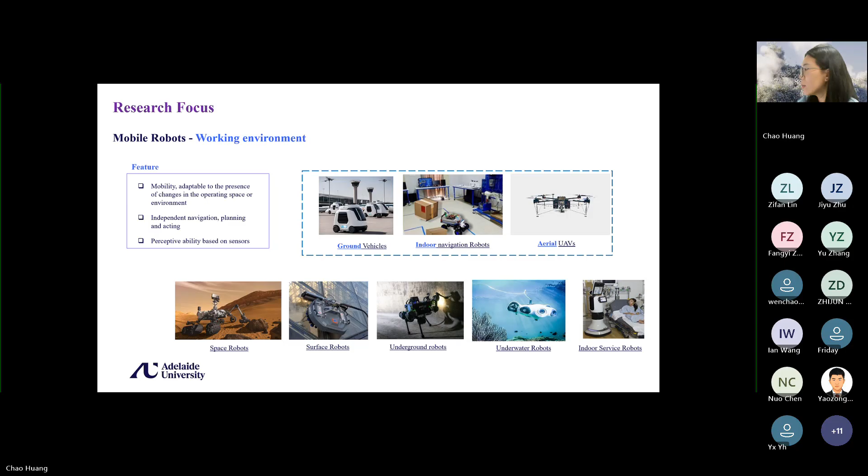If we further break them down, we can obtain this figure. It actually contains 10 research topics. Due to time limitations, I cannot introduce all of them. I will first briefly introduce the idea behind these 10 topics and then select some representative topics and provide the details. I may spend more time on the intelligent vehicle systems, as I believe it aligns with the topics and focus of this society.

So the first thing is single UAV control and application. One fundamental research question is called waypoint flight. We want the UAV to quickly go through a series of waypoints without collisions and with minimal tracking errors.

To address this problem, we devised a sequential convex programming framework for agile flight. This trajectory planning problem can be formalized as a time optimization problem subject to a series of safety constraints. Since this original problem is highly non-convex, we transfer it to a sequence of convex optimization problems through successive convexification and discretization. This allows us to achieve highly efficient computation of high quality trajectories.

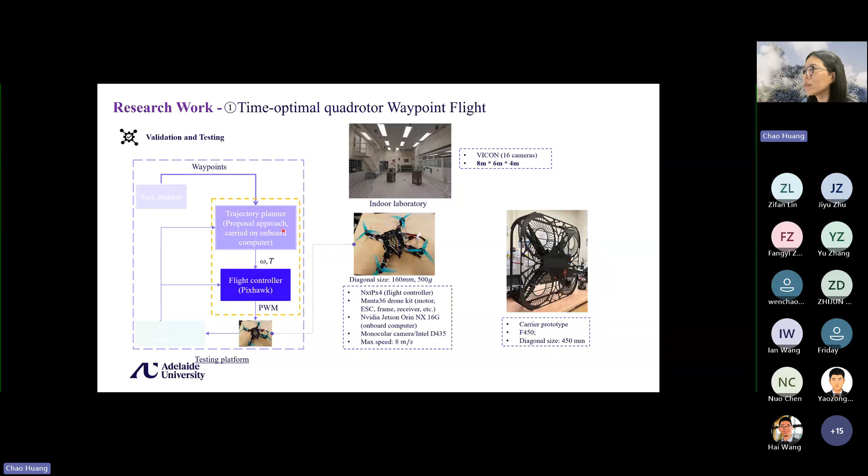So here is a demo. It shows that the UAV can successfully go through a series of waypoints. So here we actually have 7 waypoints, and the computation time is quite small. So you also find that to quickly and accurately go through these waypoints, the small UAV actually conducts a series of aggressive maneuvers, including rolling, diving, and pitching afterwards.

Next one is about the landing. As I mentioned, we are interested in how to land a small UAV on a moving aerial platform. We find that existing methods may only focus on landing on a large board, moving ground robot, and moving ground vehicle or terrain, but we focus on landing on an aerial vehicle carrier. We believe it is more challenging because it involves lots of uncertainties.

And here are our designed algorithms. I don't want to provide the details. So if you look at this figure, it shows how we actually developed this landing trajectory. We actually divided the entire landing trajectory into two segments. The first part ensures that the UAV safely reaches above the carrier platform, while the second part involves the UAV descending within a landing cone until it lands on the carrier.

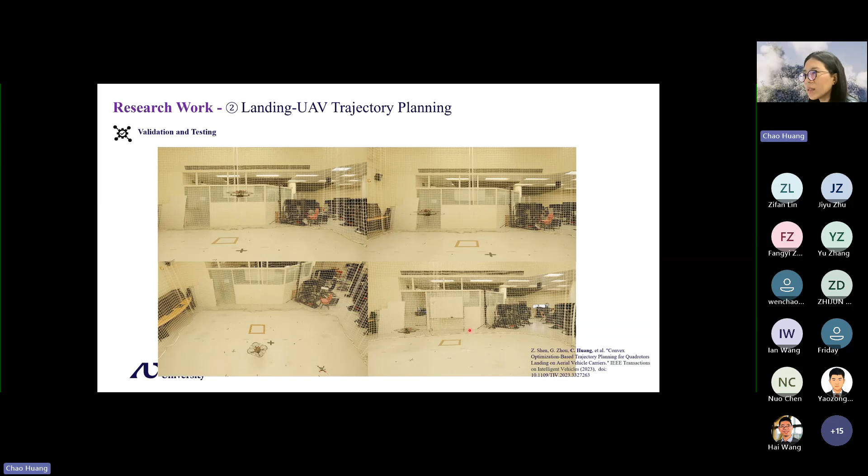We have 4 GIFs. The top 2 GIFs show that the aerial platform is stationary and the small UAV just needs to find the location of this big UAV and land on the top of the big UAV. And the bottom 2 cases show that the UAV carrier is moving. On the left, they are moving in the same direction. And on the right side, they meet in different directions. Okay.

So when the UAV can rapidly fly and land on the dynamic platform, we consider leveraging the UAV in conjunction with stations or trains to extend their flight range and facilitate tasks such as parcel delivery. So we have 2 application cases. First one, we consider the case that we have a number of charging stations. We have a depot, we have a customer here, and we want a small UAV to deliver the parcel from the depot to the customer.

But as we know, due to battery limitations, the small UAV cannot fly for a long time. So during the flight, the UAV has to land on one or several charging stations for recharging or maintenance. So in this case, we need to determine which charging station to select, when the UAV has to land on the charging station, to what percentage to charge the battery, and what if some charging stations are unavailable. So how to solve this problem? We propose a graph construction method to formulate the problem and adopt a graph searching algorithm to plan the path.

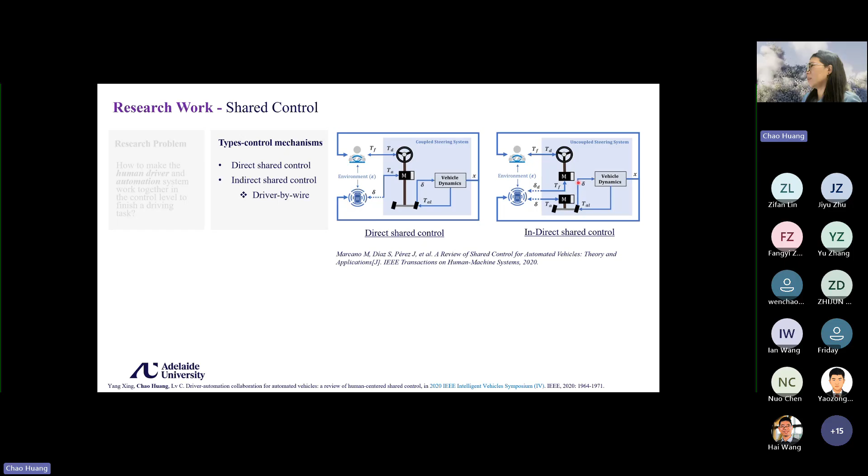If you look at these mechanical systems, you're going to find the main difference is that in indirect shared control, the driver's input does not directly transfer to the steering system. It goes to the ECU, electrical control unit, first, and after calculation, this signal then goes to the vehicle's steering system. In my research, we usually focus on indirect shared control because it provides more freedom of design.

Well, next one is about the human-machine interface. So, based on the modality of human-machine interface, it can be represented in visual, auditory, and haptic. So, basically, the first two types are usually used to provide some warning signals. By using the haptic interface, that will provide some vibration signals on the steering wheel, then it can actually provide useful torque feedback. And in this case, it can somehow assist the driver to understand the current driving situation.

And when we talk about the controller design, it can also be classified into reference-based and reference-free-based. So it is easy to understand. Reference-based means that we always have a reference signal. So in control theory, we know that sometimes we have a reference signal and we have a controller, and the controller is used to track the reference signal all the time. So in the reference-based, we always have a reference trajectory, and automation will always correct drivers' or vehicles' status if there's a difference between the reference trajectory and the current trajectory. So if you look at this figure, you can consider that automation and human actually work together all the time to finish a task.

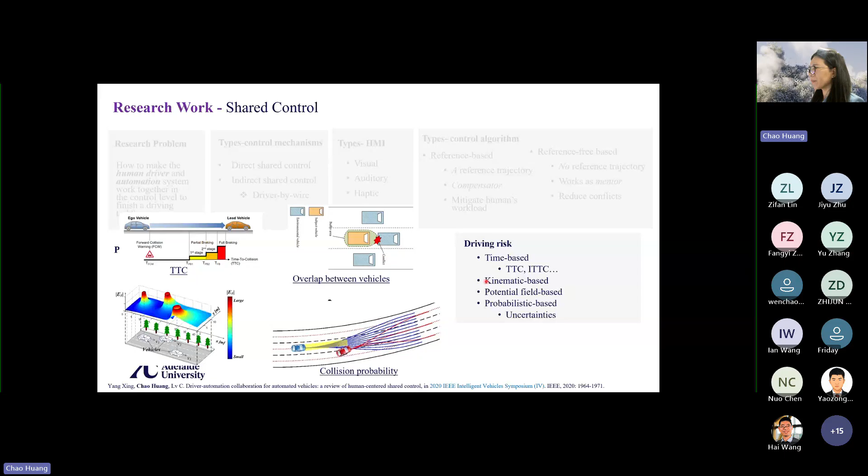So there are different approaches to estimate the driving risk: time-based, like TTC, a very traditional one, kinematic-based, potential field-based, or probability-based. And the last three approaches always need to rely on trajectory prediction. So in academia, we have several different approaches, like physics-based approaches, maneuver-based, and interaction-aware-based.

So interaction-aware-based, based on this name, you can guess how it works, right? Or guess the principle. It means that you consider the interaction among the different traffic participants and then provide a deterministic or probabilistic prediction result. I think it is a very promising approach because it is more realistic compared to the other two approaches.

Last one is about the testing environment. So as I don't have real test vehicles, I only focus on the small robot and the driving simulators. So that is what we have right now.

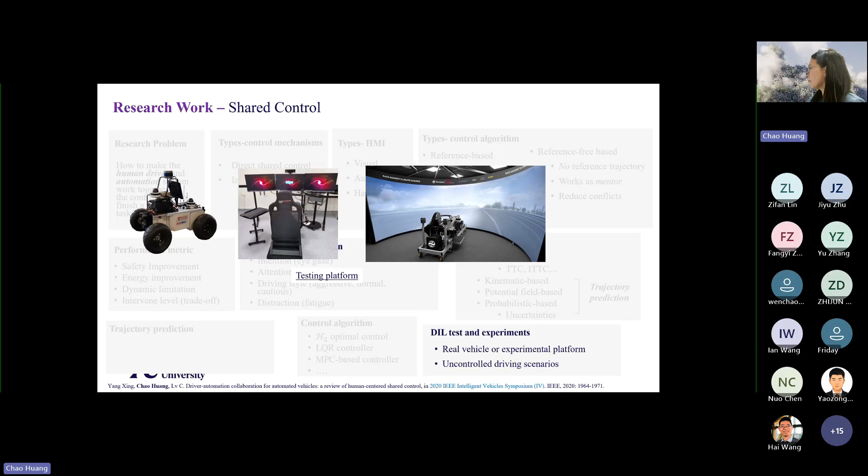Okay, so let me just have a look. Oh yeah, the first step is to establish a virtual traffic environment for testing. Okay. Oh, doesn't work.

So actually, CARLA is a very commonly used platform for testing. They already have a mature testing environment, but we want to design an environment by ourselves. So we established a 2 kilometer traffic testing environment centered around PolyU.

My previous affiliation. We collect the real traffic data in Hong Kong to ensure that the surrounding vehicles and the road conditions within the testing environment can accurately reflect the traffic conditions in Hong Kong. We also ask Hong Kong drivers to play with our driving simulator and give us some cognitive feedback. Okay.

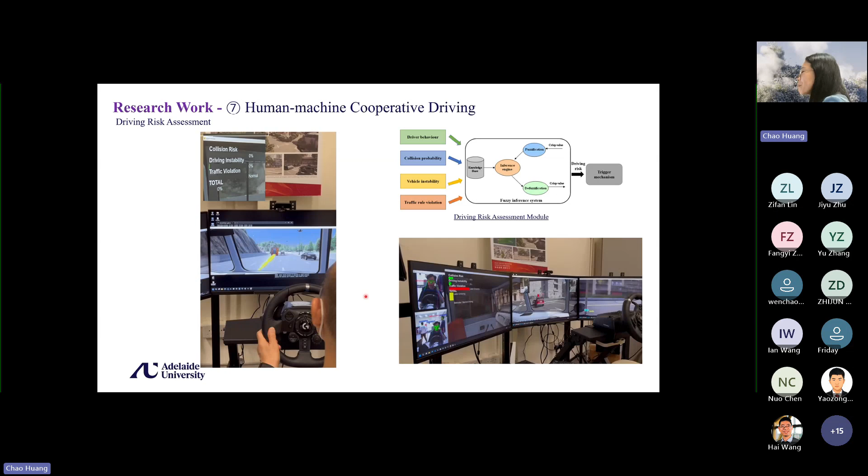So what should we do if we estimate a high driving risk? We're going to generate a path for the vehicle to follow. Due to the Hong Kong policy, we cannot directly control the vehicle, but we can provide some guidance. So in this case, we try to design a path, and theoretically, if the vehicle follows that path, we can guarantee there are no collisions in the near future.

And as I mentioned, we use RRT. We designed a human motion RRT algorithm because it can quickly grow a tree, cut the unuseful branches, and quickly find a feasible path. So these are some simulation results, and that is how we grow a tree and cut the branches, and then finally find the feasible path.

And to speed up the calculation, at every sampling time we didn't regrow the tree. We actually used the previous tree and kept some useful branches. So in this way, we can save a lot of computation time.

Sorry, I forgot to mention, we also consider the driver's driving skill. So if we find that the driver is very aggressive, then we provide a bigger safe area. This means we have a smaller tree growing area. So for the aggressive driver, we provide a much safer path for them to follow.

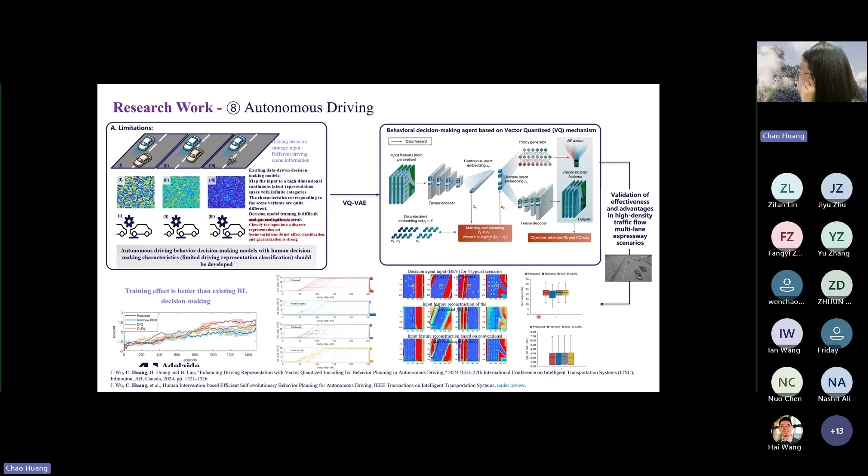And the second work was conducted by my PhD student. It focused on improving the safety and efficiency of reinforcement learning navigation. The key idea is inspired by human psychology. When humans explore an unknown environment, our decisions are often influenced by two factors: curiosity and fear.

So we created this word, it means fear plus curiosity. Curiosity encourages exploration, but fear helps us avoid potential dangers. Based on this observation, we propose this feariosity-guided reinforcement learning framework. It can explicitly model both curiosity and fear within the learning process.

The curiosity model encourages the agent to explore unfamiliar situations, while the fear model uses a learned world model to estimate potential risk and guide behavior. These two components are integrated into the reinforcement learning framework to balance exploration and safety.

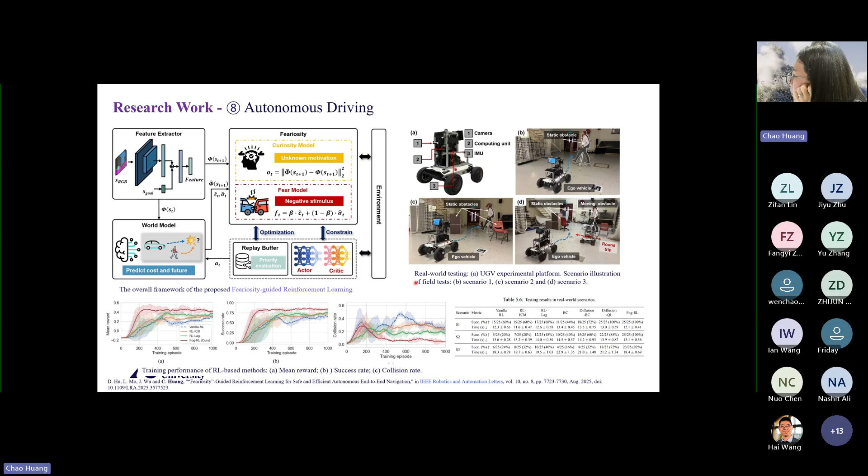The figure also shows that we achieve higher rewards and success rate while maintaining a lower collision rate than existing approaches. So here is a video.

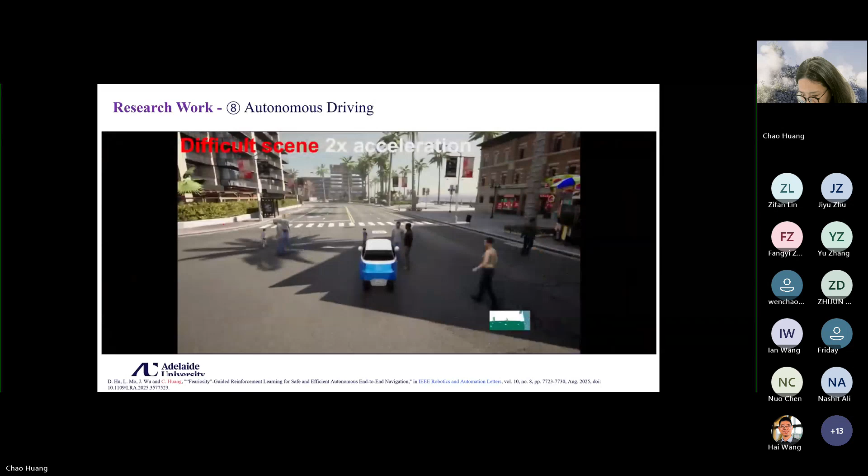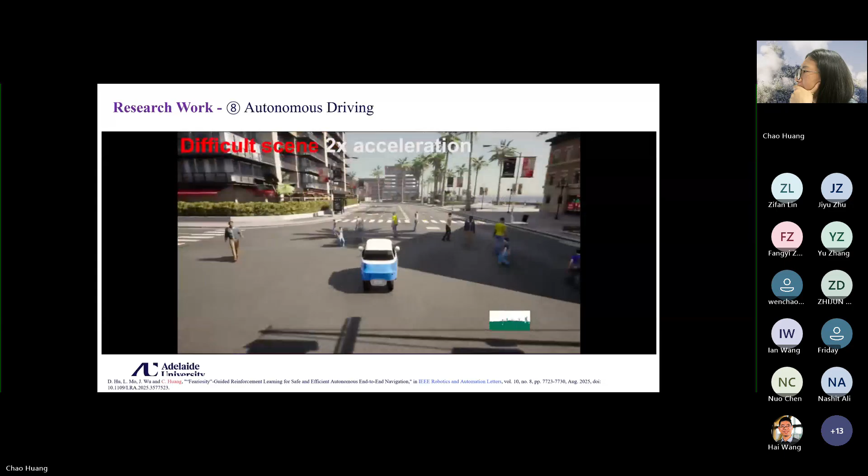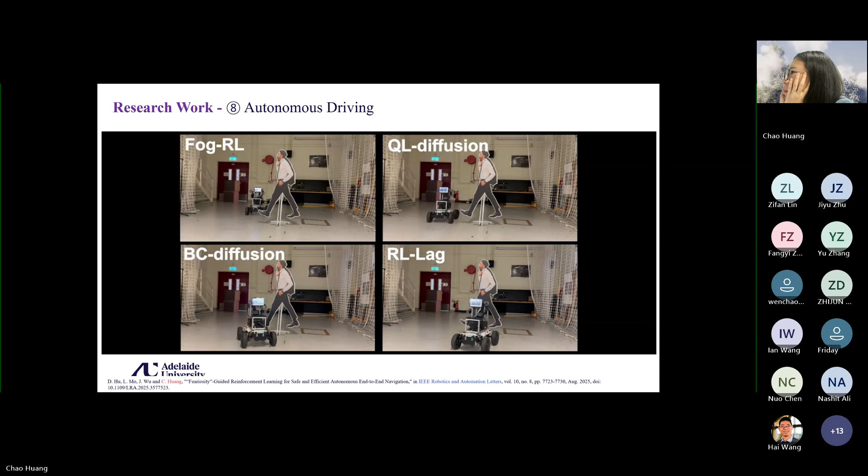Yeah, this is our approach. Okay, the left top one.

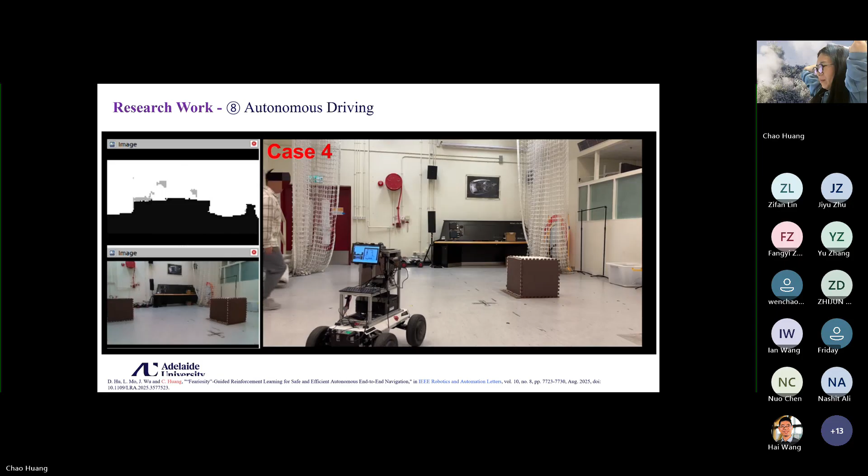Then we go to the last task. This task extends the idea of human-in-the-loop reinforcement learning.

Existing approaches assume that human guidance is always beneficial and should always be incorporated during training, but this assumption is not always true. So the key novelty of this work is the introduction of a trust calibration mechanism.

Instead of blindly following human intervention, the agent continuously evaluates the quality of human guidance and calculates a belief value. When the human guidance is beneficial, we incorporate it into the training process. When the agent becomes more capable and the human guidance is no longer helpful, the intervention is automatically masked.

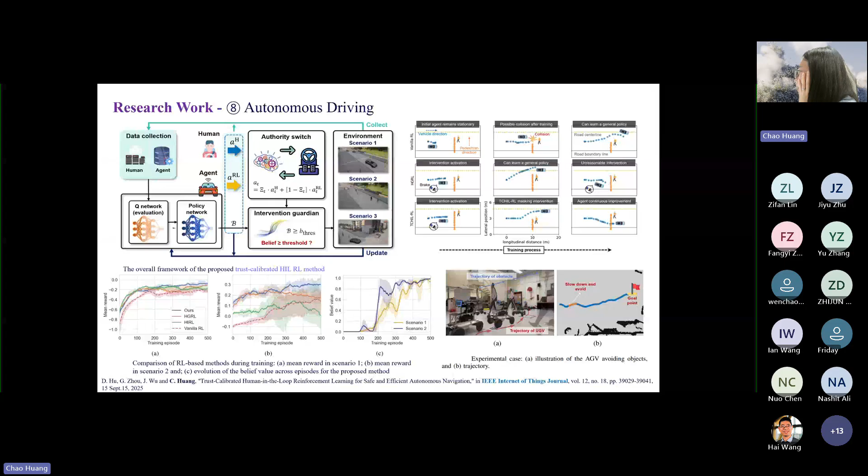In this way, we combine the advantages of human knowledge in the earlier training stage with the learning capability of reinforcement learning in the later stage.

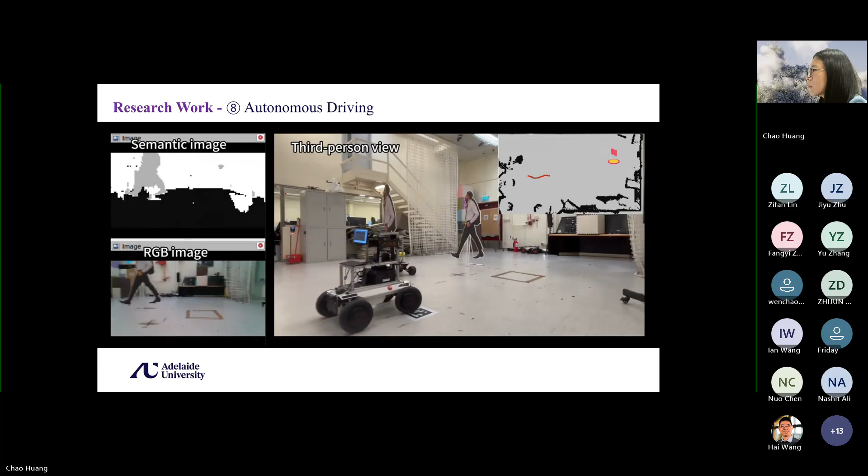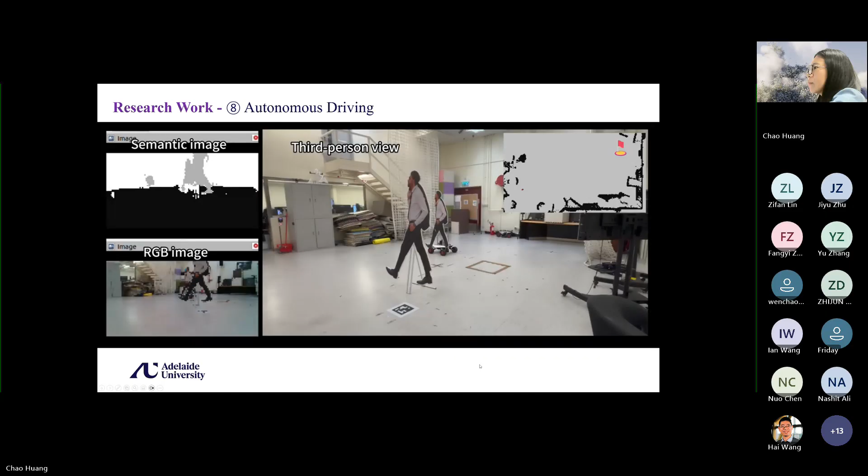Thank you very much, Dr. Huang, for the excellent presentation. We have really seen lots of interesting and informative videos regarding those proposed methodologies. Dr. Huang gave us a talk regarding path planning, trajectory design, and multi-UAV collaboration, and in the second half of her talk, she detailed the human-machine cooperative driving and fully autonomous driving for ground vehicles. Those videos and demos are quite informative for all of us.